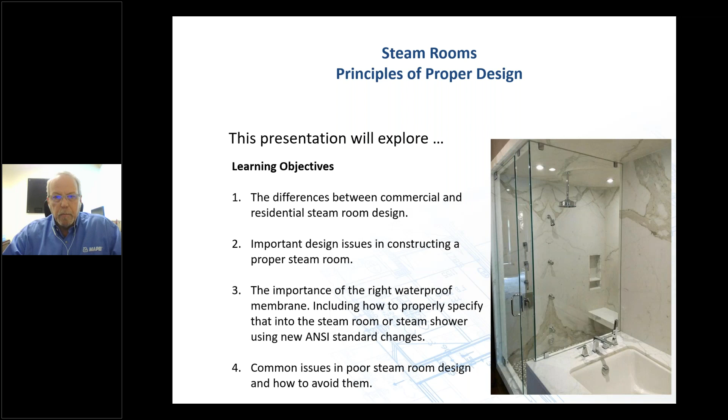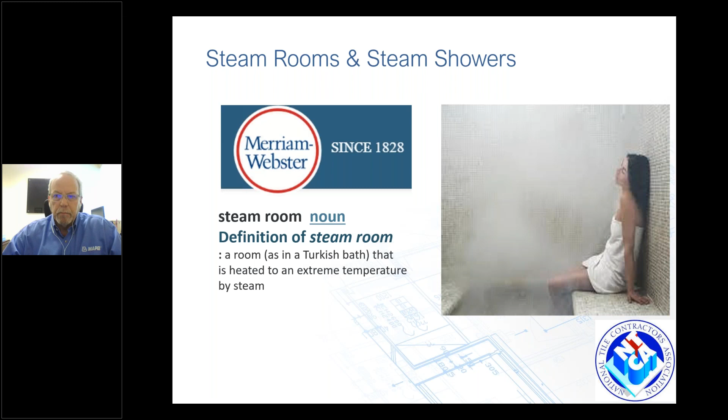Merriam-Webster defines steam rooms as a room that is heated to an extreme temperature by steam. Some of the things we'll talk about today will be waterproofing, again, the ANSI 118.10 standard, the E96 method E, I'll explain that in more detail. What a vapor membrane is. We'll talk about how to designate a vapor membrane, as well as a trowel applied, sheet, or liquid applied membrane. The TCNA handbook methods that are relevant to steam rooms. Unfortunately, we'll show some pictures of some ugly showers or steam rooms that have failed. And we'll talk briefly about movement joints as well.

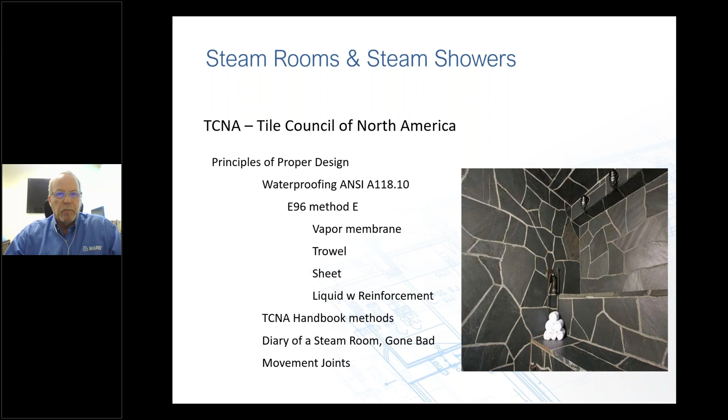The ANSI 118.10 standard. This is a new section added to the 118.10 standard. In the past, we had all of the requirements for steam rooms in the TCNA handbook, and I'll show you that as we get further into this presentation. And that's the only place we listed it. And the requirement was that the waterproof membrane has the ASTM E96 method E at temperatures of 100 degrees and 90% relative humidity. So in other words, we're trying to test the membrane at a steam room type condition.

So this section was added to ANSI as well. It's still in the TCNA handbook, but we added it to the ANSI handbook so that an architect or designer, or for that matter, you can know how to select the proper membrane for steam room. So a new section was added, 4.6 water vapor permeance. It was passed. It was actually voted on last October. I think we finally got the final votes in the end of November, 1st of December. It'll be published in the ANSI handbook that should be out by Coverings. So again, this will be added to the ANSI handbook, and water vapor permeance will be an option, not required, but an option within 118.10.

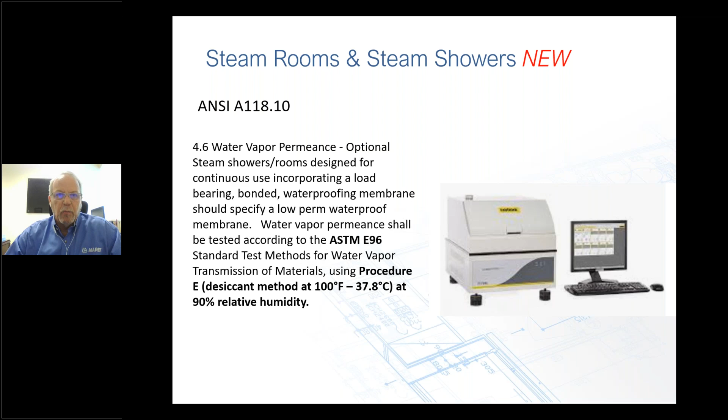In addition to that, there's an optional performance requirement for low perm rating of less than 0.5 perms. For a waterproof membrane that meets 0.5 perms or less, you can add a designation to your ANSI number. So ANSI 118.10 TV means a trowel applied membrane, 118.10 LV is for a liquid applied vapor membrane, and 118.10 SV is for a sheet applied vapor membrane.

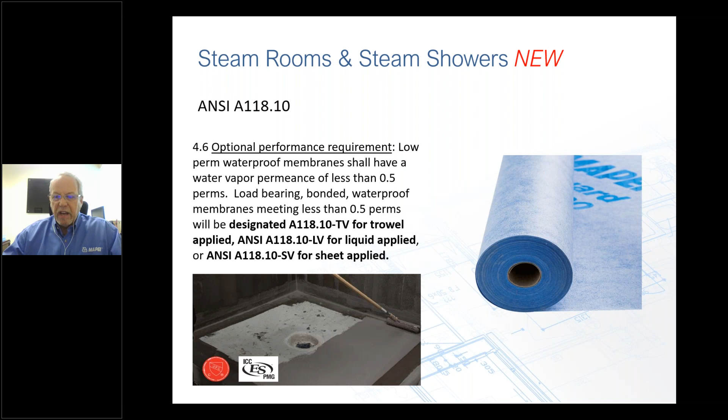That's a big change. The big benefit to this is it can be specified, or you can call out a specific product. This hasn't actually been published yet, but it'll be out very soon, and hopefully people start adding it to their data sheets so you'll know clearly it's suitable for steam showers.

All right, we're going to go into TCNA and some of the things they ask for in the handbook. First is the environmental exposure classifications. I'll show you what that looks like, but steam rooms meet Residential 4, Res 4, or Commercial 4. The big difference is residential is for intermittent steam room showers, in other words, used occasionally.

COM 4 is for commercial, heavy humidity, heavy moisture exposure. It's considered to be used for continuous use, like an athletic facility where you work out, they've got steam rooms that run 24/7. Entirely different type of construction. Obviously that one has to be a lot more bulletproof.

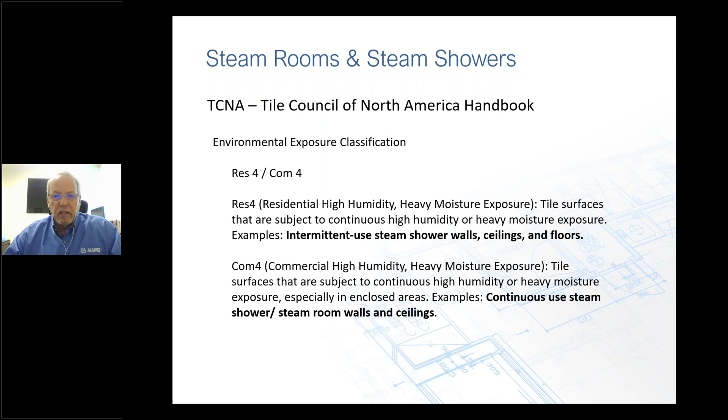So continuous steam shower or steam room, walls and ceilings. This is the environmental exposure classification in the TCNA handbook, or a copy of one. There are residential as well as commercial recommendations for everything from a fairly dry room, Res 1, to submerged, which is Res 7, like a pool.

Same thing true for commercial. You've got COM 1 for commercial dry. Again, COM 4 we just talked about with continuous use shower, steam shower. And it goes as high as COM 7 for submerged applications. If you've never really paid much attention to this page, it's really very helpful. Every single TCNA method has an environmental exposure classification on them.

Again, TCNA method SR 613 is for masonry and mortar bed for continuous use steam rooms and steam showers, like an athletic facility, a Turkish bath, Roman spa, or just a spa in general, Roman grottos.

Some of the notes within that method: steam rooms are highly specialized applications. Design and installation are critical to avoid damage to adjoining materials from vapor migration. Design criteria must include consideration of necessary insulation and temperature and humidity differentials. Dew point must be considered in the construction of steam rooms. One side of the wall will almost always be considerably warmer than the other side. This is extremely important when you've got an exterior wall too.

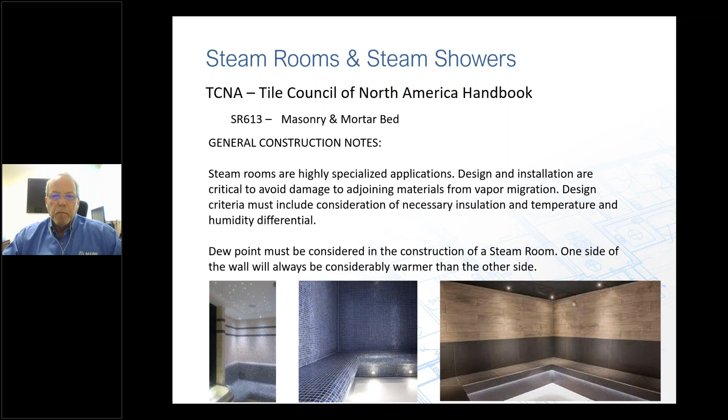Again, still SR 613, some more notes. The bonded waterproof membrane, sheet, liquid, or trowel, must be continuous and must adequately limit vapor transmission to adjacent spaces and building materials, according to the intended duration of the steam room and steam shower. Use a tile contractor knowledgeable in steam room installation and experienced with materials specified. That's within the standard, within the method, I should say.

Careful coordination must occur between the door manufacturer and waterproofing. If you have a glass door going on, obviously you don't want them coming through and drilling through your waterproofing later on, and if so, it has to be waterproofed again properly. Attention must be paid to the installation of the glass door casing, doors in general. Minimize penetrations, reseal those that must occur.

I just put up a large glass door on a 5-foot opening, two glass doors that slide side to side. And I got to tell you, I think the glass door manufacturer, at least in this case, because it did have a sill plate, did a pretty good job of telling you how to keep it waterproof, putting sealant around the penetrations as well as up and down the casing, the sill, etc. So I just did that last week, so we could do a video shoot.

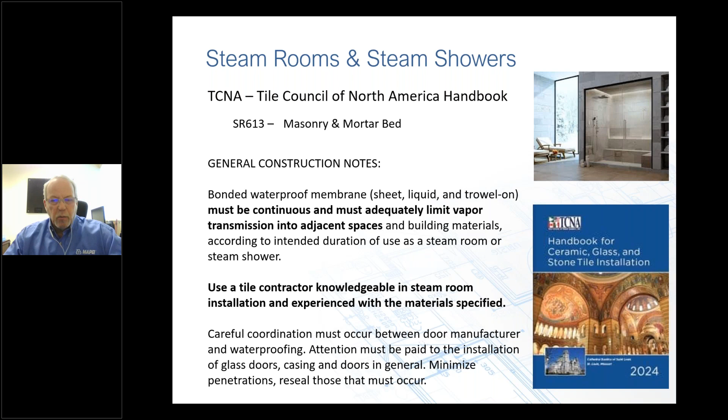Waterproofing, again, TCNA SR 613. This is for continuous use. Again, this is in the method, and previously it listed the low perm waterproof membrane at 0.5 perms or less when tested with ASTM E96 procedure E, tested at 90% relative humidity. If the waterproof membrane has a permeance higher than 0.5, then a vapor retarder behind the wall assembly is required. Below, you can see some of the test conditions, and this is why we say E96 procedure E, shown on the bottom right. This is what the method looks like. We'll break this apart and look at some of these details in a little more detail.

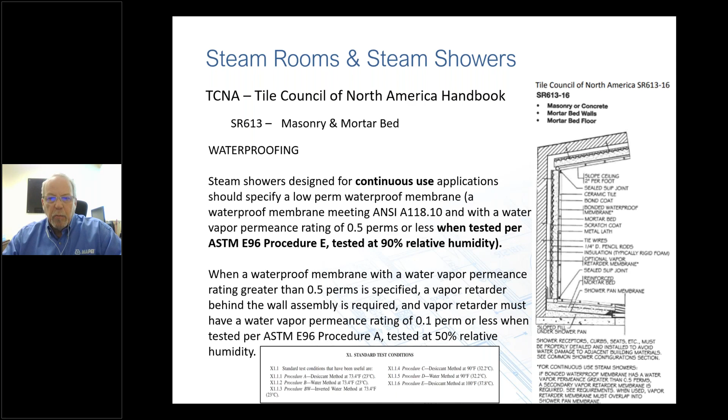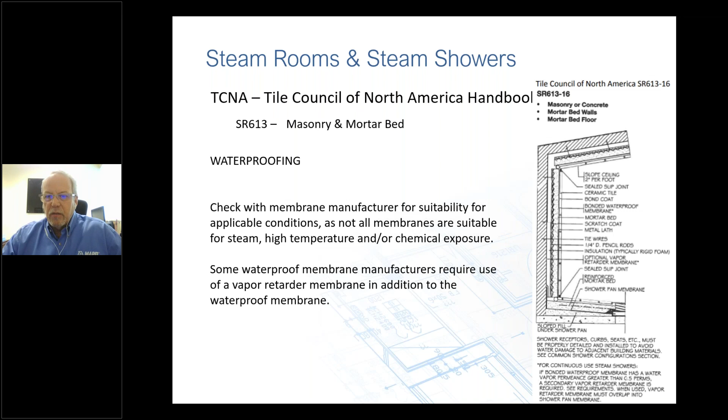Check with the membrane manufacturer for suitability for applicable conditions, as not all membranes are suitable for steam, high temperature, and or chemical exposure. I've heard of some membranes actually melting due to the steam. Some waterproof membrane manufacturers require the use of a vapor retarder in addition to a waterproof membrane. I think everybody's kind of getting away from that, but it's a good reason to ask. If they require that, it'd be wise to add it. Consult the manufacturer for any requirements when waterproofing a steam room.

When used, a vapor barrier must weather lap itself, or ship lap, and lap onto the shower pan. So this is a shower pan, a sheet shower pan, like a Chloraloy, already installed in a mortar bed, and then the membrane has to overlap on top of the shower pan membrane that's sticking up. We want to make sure things are flowing positively. If water comes down the wall in the case of a mortar bed and hits the waterproof membrane, you want it to go in front of the shower pan membrane, not behind it. Bad idea—you're going to have all kinds of damage.

If a vapor retarder membrane is required, an integrated bonding flange cannot be used. So an integrated bonding flange drain is what we're talking about there. You can't be waterproofing on top of the mud—it has to be from the bottom.

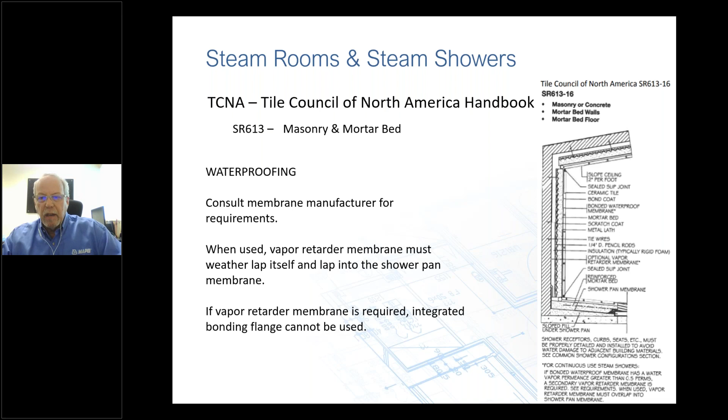Oh, come on, I just got a thing to update something. How does this happen right in the middle of a webinar? It's inevitable, isn't it?

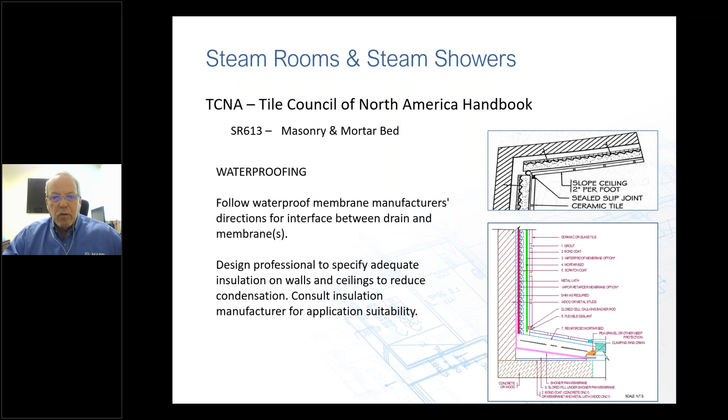Follow waterproof manufacturer's directions for interfacing between the drain and other membranes. Design professionals should specify adequate insulation in the walls and ceilings to reduce condensation. Consult the insulation manufacturer for application suitability. Quite frequently, they'll put insulation in there as well to protect the membrane so that something doesn't melt it. If it's designed that way, make sure you get one that's recommended by the manufacturer for a steam room.

Again, for continuous use with a mortar bed, the easiest way is to put a slip joint in there. Seal all membrane penetrations with appropriate sealant according to the membrane manufacturer's requirements. Specify slip joints at changes of plane. Let's talk about a sheet membrane, since that's the easiest way to explain it. You take that membrane and tuck it into the opening so it forms a U shape, and then a backer rod and sealant go on that—an easy way to make sure it can move if it has to. If it's a mortar bed, the metal lath has to be cut at all slip or movement joints, like inside corners, for example.

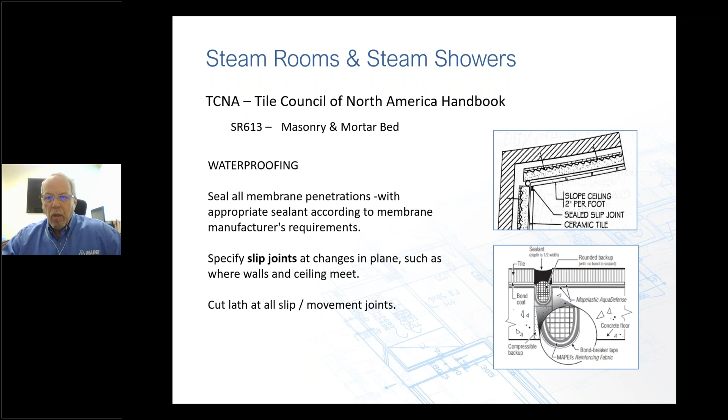In the case of steam rooms, the ceiling has to be sloped. The requirement in SR 613 is 2 inches per foot, to avoid condensation dripping onto the people sitting in there or enjoying the space. In large areas, you can slope from the center down to multiple walls or 2 walls, but it's critical that you slope the ceilings. I'll show you some pictures of not-the-best-looking steam rooms that weren't sloped. Slope the shower pan membrane 1/4 inch per foot to the weep holes of the drain. Shower receptors, curbs, seats, niches, and anything like that really should be sloped to avoid water building up in them.

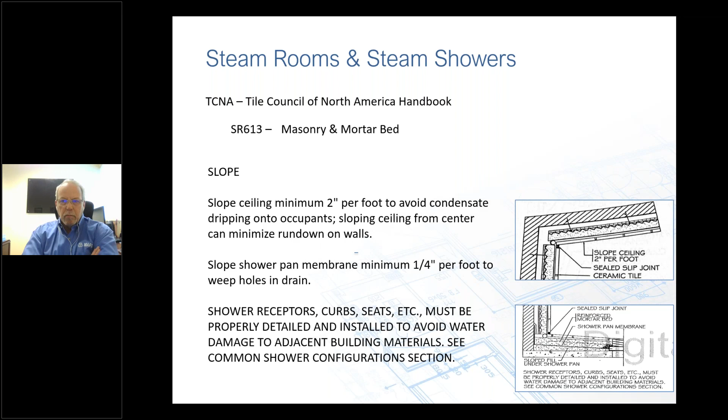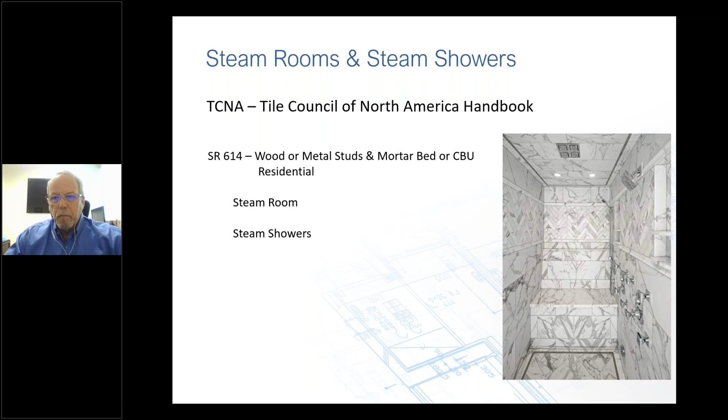Now we're going to talk about residential. This is probably the one we're most familiar with, commonly done over wood or metal studs, usually with CBU or backer board, or mortar bed for that matter, in residential steam rooms or steam showers. I consider most of these residential steam showers since they're a lot smaller, not really built for multiple people, but in SR 614, the method for residential steam showers...

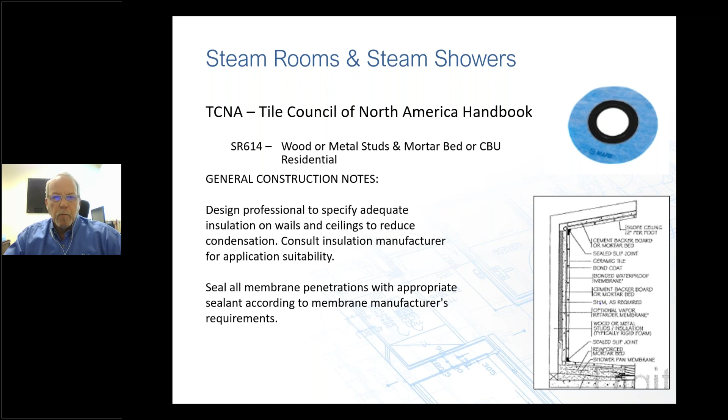...requires the design professional to specify adequate insulation of the walls and ceilings to reduce condensation and consult the insulation manufacturer for application suitability. Seal all membrane penetrations with the appropriate sealant according to the membrane manufacturer's requirements. If you're using a sheet membrane, a lot of us have rings and things like that to make it a whole lot easier. Just slide it over there and seal it off, then thin-set that to the existing membrane.

SR 614 for steam rooms and steam showers framed with wood or metal studs: specify the mortar bed walls option when wall flatness is critical, such as when the walls have tile with one edge longer than 15 inches—so we now kind of consider large format tile. Maximum stud spacing is 16 inches on center.

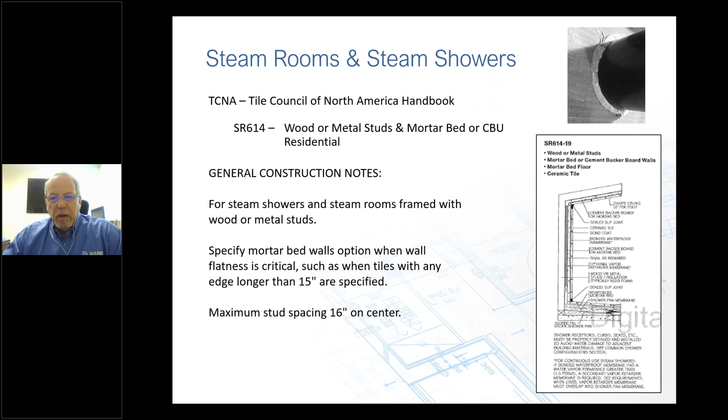All right, now we're going to look at a few steam showers. Here's one that is not sloped properly, and you can see the effect. Would you want to be sitting underneath that? Probably not—getting rained on the whole time. That's why we slope the ceiling.

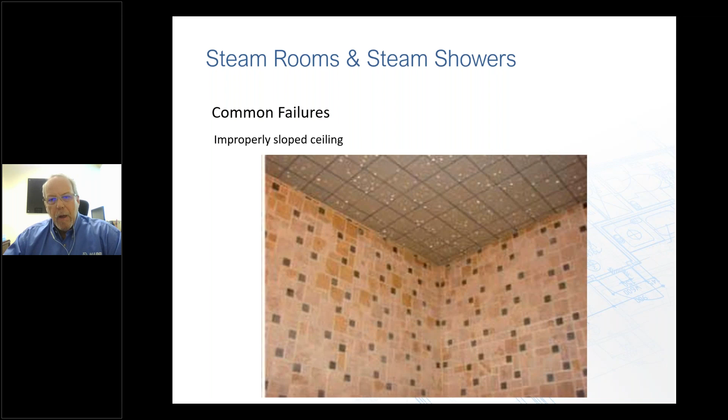Another one. Mold. If you don't pay attention to moisture and steam and vapor, all kinds of things can start growing in there. This is just outside the door when they open it—that's what it's done to the drywall above it. All that needs to be in consideration.

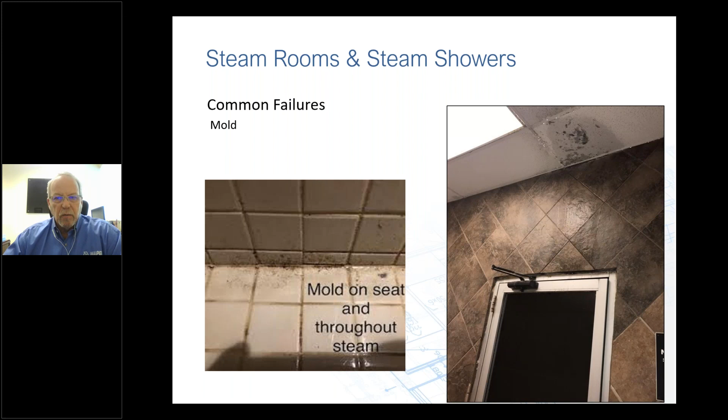This is a selection of the wrong product—another manufacturer's single component urethane grout. This was a $30,000 doctor's steam shower at his home, and you can see how steam got through the grout product and just collected behind the glass tiles. Needless to say, he did not like that look.

This one had an arch door on it—very, very interesting, very cool looking shower, much larger than what you can see here. We're actually inside there taking a picture. But unfortunately, it had to be torn out and redone because steam got back behind there.

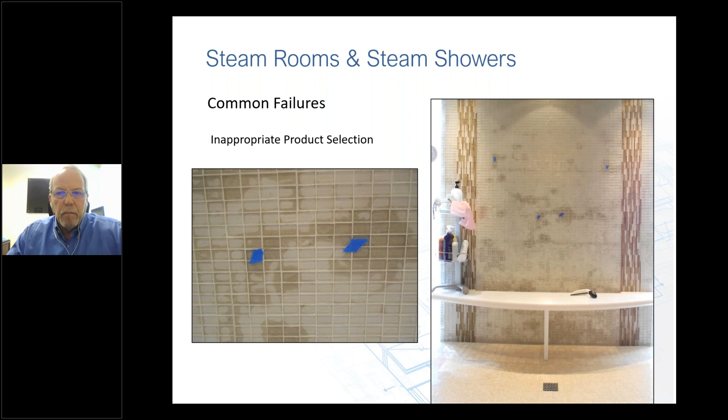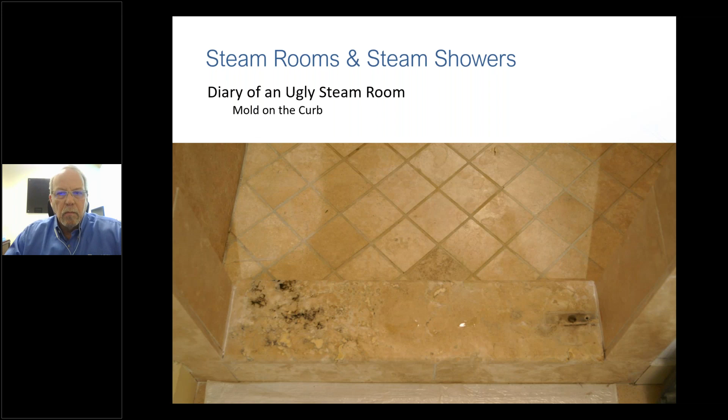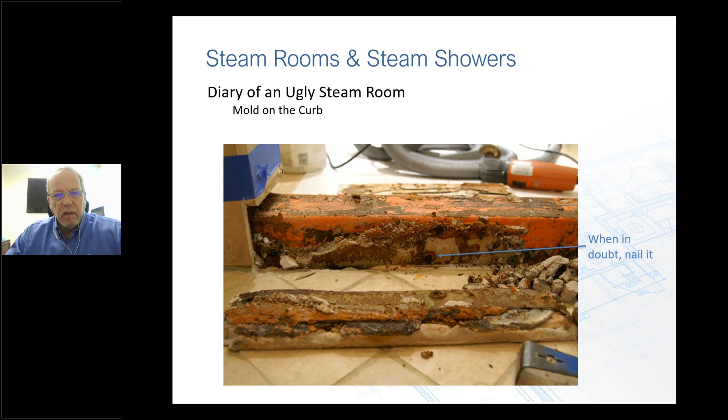This one I'm going to show you is a steam room gone bad. You can see the mold already occurring on the curb. Why? Well, there's a sheet membrane there, but the problem is there are nails going through it. You see two nails right there—that's to the shower side, by the way, not to the outside. That's on the inside.

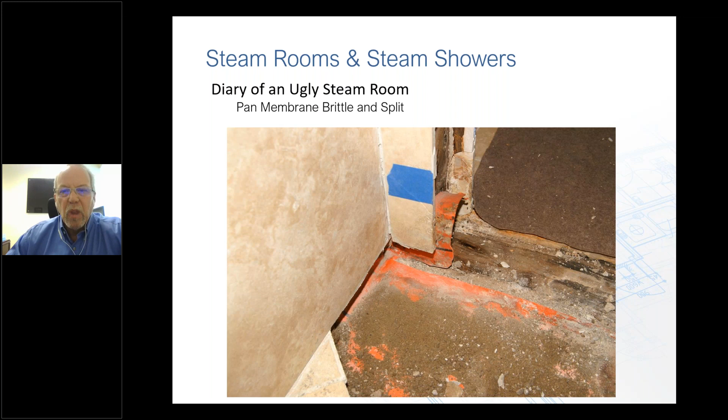Water damaged lumber. Membrane that's now brittle and splitting, cracking, just because it's aged. Unfortunately, mold on the seat as well—that means the seat's molding underneath it.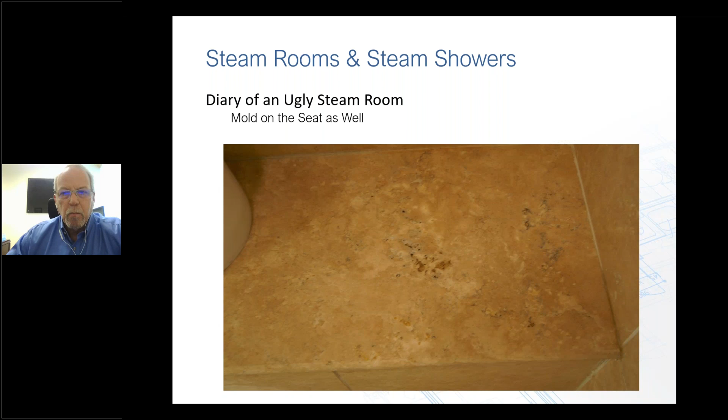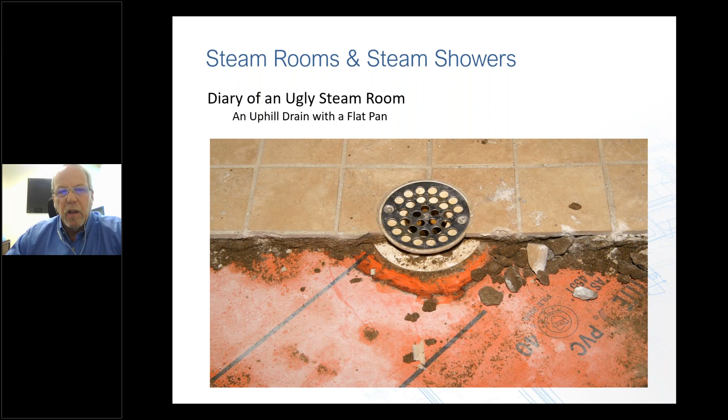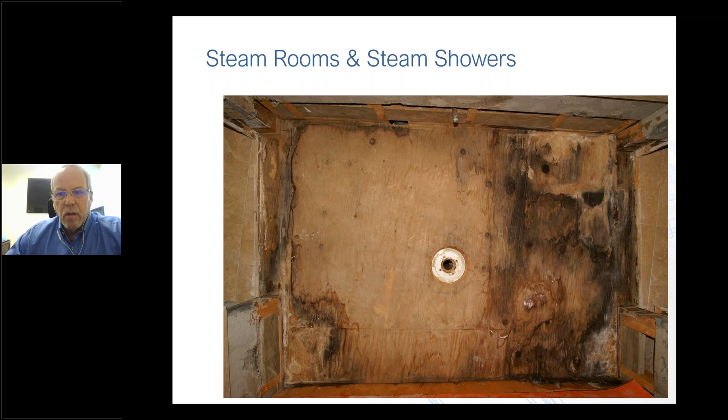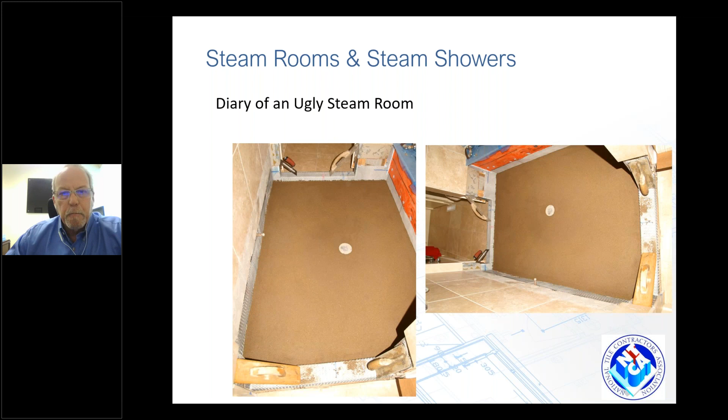Here's what that pan looked like once everything was taken out—a lot of damage. Fortunately, this is what it looked like when a good installer got back in there and was able to do the repairs. You can see the mortar bed pan, finished and reinstalled.

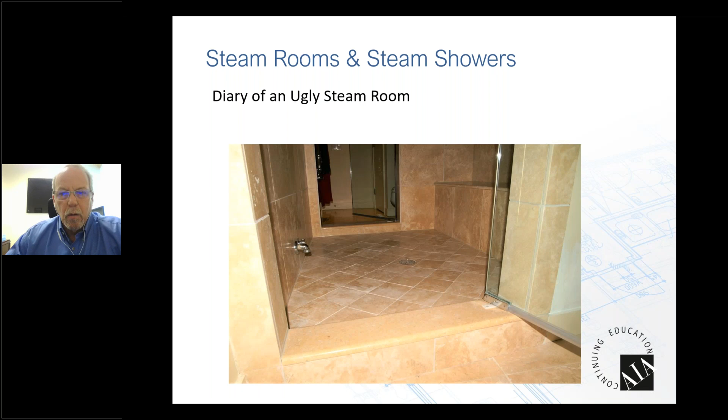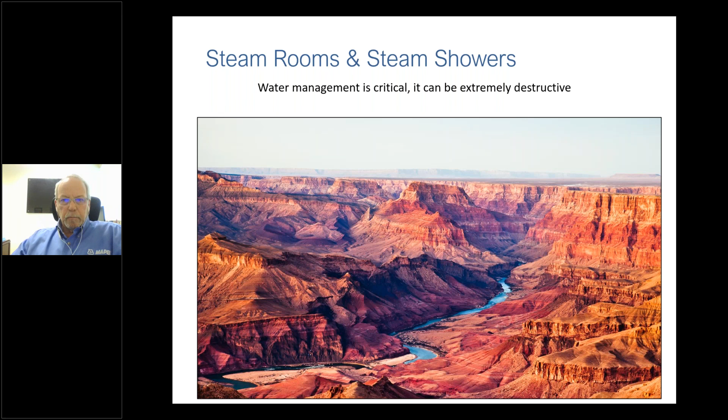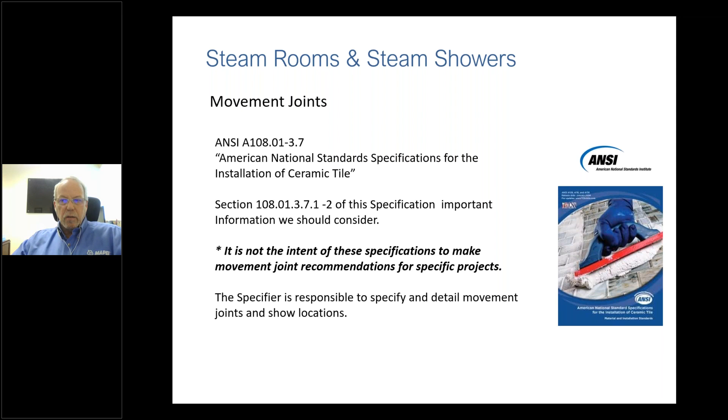We'll talk about movement joints in ANSI A108.01. It is not the intent of these specifications to make movement joint recommendations for specific projects. The specifier is responsible to specify and detail movement joints and show locations—that's in ANSI as well. All openings for movement joints shall extend completely and directly through the tile work down to the structural backing. The membrane can remain continuous still, but like lath as an example, you'd want to cut that.

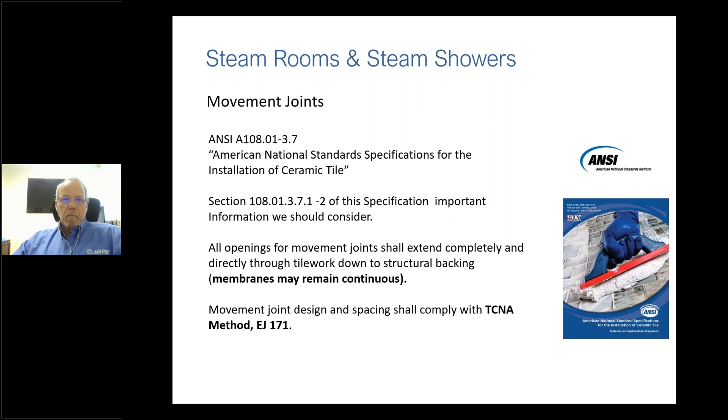Movement joint design and spacing shall comply with TCNA method EJ171. Let's talk about that a little bit. This is EJ171 in the TCNA Handbook 2024—off the top of my head, I'd say an 8-page document, maybe 7. It's a pretty good sized document though. Included in it is the location and frequency of joints, the joint width, what materials should be used for that joint, what type of sealant as an example, interior, exterior, all that.

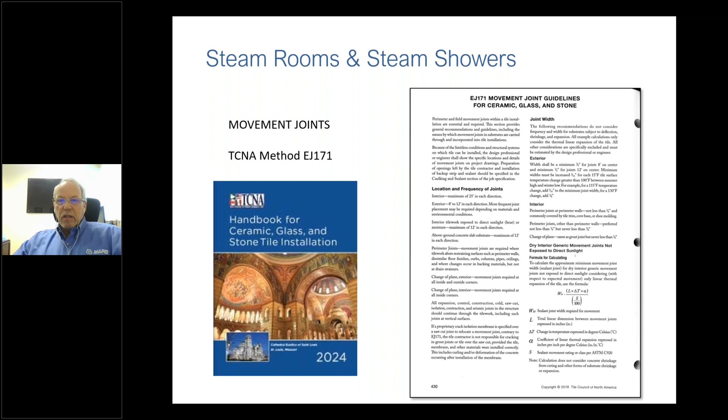One fairly new picture we put in 2018 was actually highlighting or showing you where the movement joints should be. Perimeter and field movement joints within the installation are essential and required. Not a good idea, not if you get around to it. Like, it's essential. It has to be done.

Because of limitless conditions and structural systems in which tile can be installed, the design professional or engineer shall show specific locations and details of movement joints on the project drawings. Preparation of the opening left by the tile contractor and installation of backup strip and sealant should be specified in the caulking and sealant section of the job specification. So it's got good direction for design professionals as well.

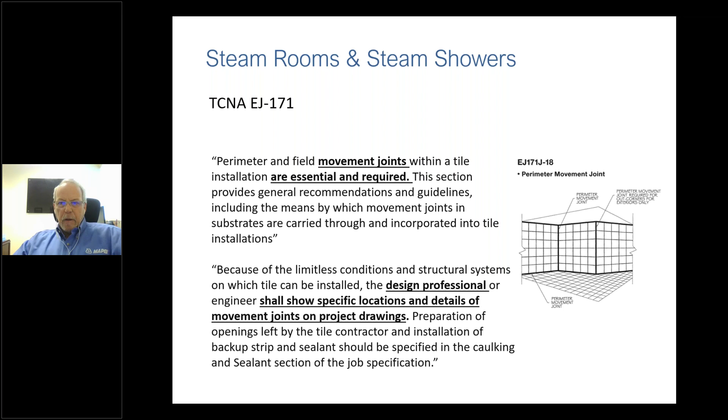I know this one went pretty fast, a lot faster than I thought it would. In summary, steam is powerful enough to drive a train. It's that powerful. So carefully follow TCNA and ANSI standards regarding steam rooms. Know the finer details of steam showers: the appropriate waterproof membranes, setting materials, grouts, and sealants. Understand steam's effect is powerful. It can easily destroy walls, floors, and cause major leaks within the household.

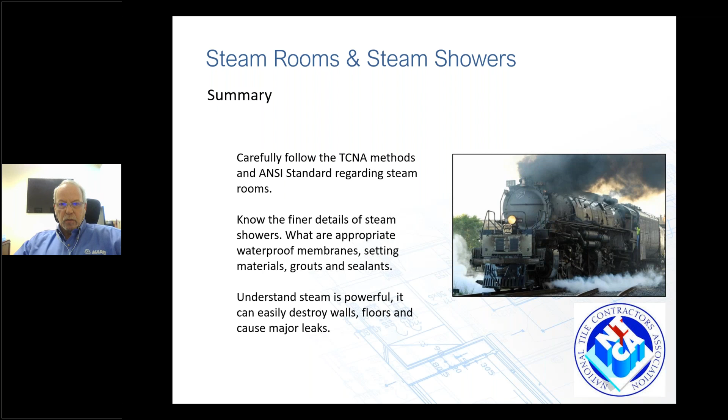Thank you. And I'll mention that a lot of those steam room pictures came from NTCA members, and so I'd like to give them compliments and point their companies out to you. Great job. And thank you for pointing out NTCA members.

But I just want to make sure you know that we always work together, all of our associations and groups here in the United States. I had the opportunity to go to Cevisama this last week in Spain. It's their show similar to Coverings. I'd like to pat you all on the back because we are way ahead of them in regards to installation methods and standards. And Jim, you're a big part of it. Thank you. Means a lot. Hey, I do have a bunch of questions here for you, if you're ready. Good, good. All right. Sure.

The first one is, can we still use the pre-sloped shower trays that are waterproof? If the manufacturer recommends it. You know what? That's a really good question. Everybody should understand, manufacturers' recommendations always supersede any other methods and standards. They're the ones warranting it and standing behind it. So if they give you the okay to do it, that's their standard, right, Jim?

Right, exactly. And with the SR 613, what you could not use, and maybe this is what they're getting at too, is an integrated bonding flange drain. The reason for that is because your waterproofing is below the mortar bed, not at the top. So you're tying in at the weep holes, not at the drain collar itself. I hope that answers that question. So Ike, if you have more you'd like to add to your question, just type it in and we'll get to it in a little bit.